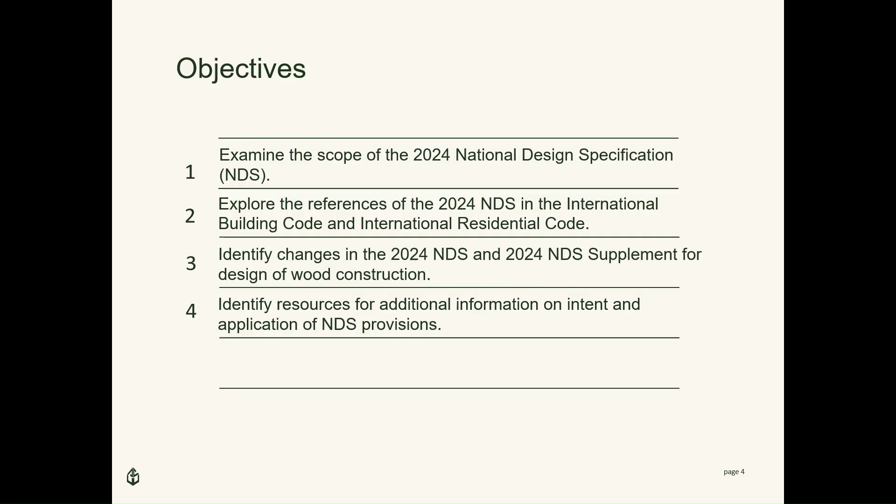Starting off with a little bit of history, the 2024 edition of the NDS is the 18th edition of the standard. The NDS was first issued in 1944 as the National Design Specification for Stress Grade Lumber and its Fastenings. In 1977, the title of the specification was changed to its present form.

This slide shows the scope of the 2024 NDS, which is the structural design of wood products and their connections. This basic scope has remained unchanged since the 1944 edition.

Beginning in 1944, the standard included visually graded lumber and glued laminated timber. In 1968, machine stress rated lumber was added - now it's grouped under mechanically graded lumber. In 1971, round timber piles was added. In 2001, round timber poles, prefabricated wood I-joist, structural composite lumber, and wood structural panel chapters were added. And in 2015, a chapter on cross-laminated timber was added.

Other milestone changes that occurred but are not picked up in this scope statement will follow. I thought I'd include these, knowing that many designers use the NDS for evaluation of existing structures, and knowing where some of these major changes occurred may help in the assessment of the building's vulnerabilities based on the design requirements at that time. So beginning with the 1968 through 1977 editions of the NDS, in particular 1968, 1971, and 1977, the standard saw reduced tension design values for either glued laminated timber or sawn lumber.

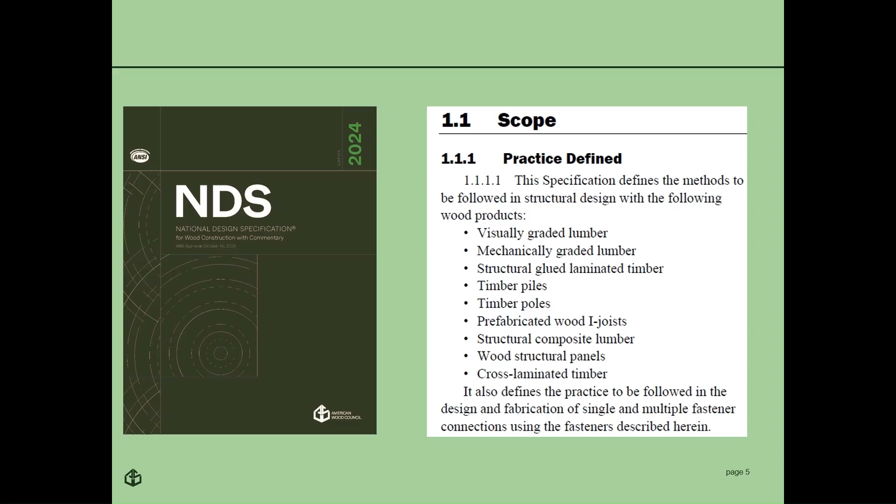The 2024 NDS is referenced in the 2024 International Building Code and the 2024 International Residential Code. In the 2024 IBC, primary references are in 2306.1 for allowable stress design of wood construction, 2307.1 for load and resistance factor design of wood construction, and 722.1 for calculated fire resistance of exposed wood members and decking. In the 2024 IRC, the primary reference is in R301.1.3 for engineered design of wood construction exceeding the limits of the IRC.

These code sections describe the general reference to the NDS, but more simply, for folks that aren't familiar with the NDS, it's used to size all structural wood elements, including wood rafters, floor joists, headers, beams, columns, and their connections in the IRC and the IBC.

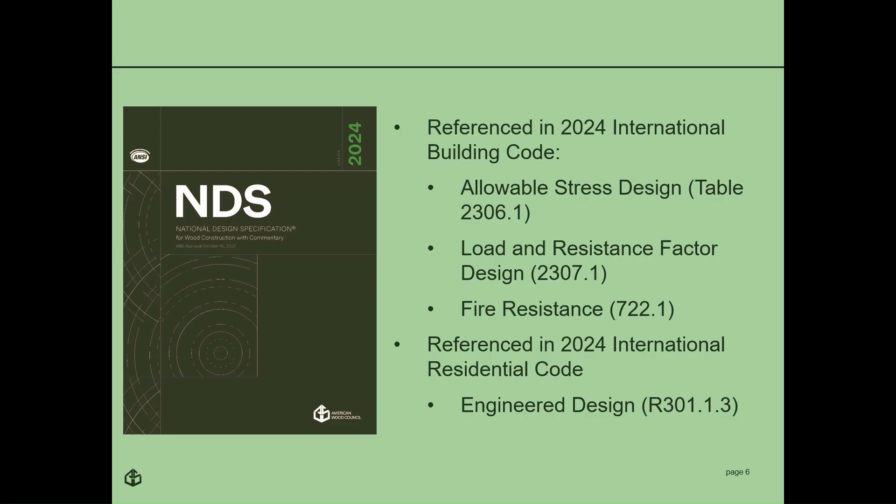This is the first of several slides taken from the redline version of the 24 NDS. The redline version is something the AWC Standards Committee uses when balloting the near final version of the NDS. New material is shown in red underline, and deletions from the 2018 NDS are shown in red strikeout. I'll be stepping through the redline version of the NDS. It has 16 chapters, 14 appendices, and a reference chapter section. By the end, my hope is that those of you using the 2018 NDS will have a very good feel for changes coming with the 24 NDS. And for those already using the 24 NDS, hopefully this will help you more quickly determine if there was a change from something you were doing previously.

So this is the one and only slide dealing with changes to Chapter 1. You'll see a change in 1.4.2.1. The term approved, meaning acceptable to the authority having jurisdiction, was added. It primarily comes into play when referencing manufacturer's approved instructions or manufacturer's approved evaluation reports. It also comes into play for use of approved alternate methods, alternate to those that are prescribed in the NDS.

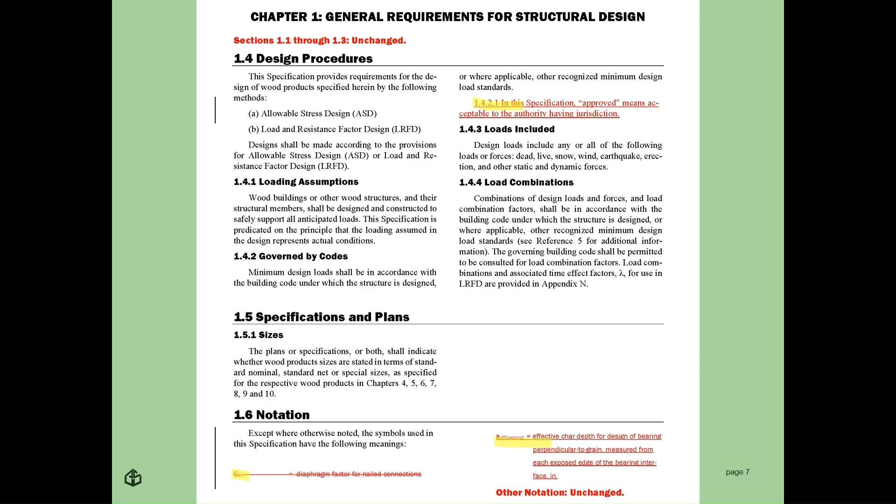Another change showing up in Chapter 1 is deletion of the diaphragm factor in notation. I'll cover that more in Chapter 12. Also, addition of the term A effective bearing, and that happens in Chapter 16, so I'll cover that when we get to Chapter 16.

For Chapter 2, Design Values for Structural Members, all the changes are shown on this slide. We can see in footnote 2 of Table 2.3.2, the words treated with are added, and this is done to clarify that load duration factors greater than 1.6 do not apply whether fire retardant chemicals are applied to wood through a pressure process or an alternative process that does not involve pressure. A similar clarification appears in section 234, except to achieve the same intent, the word pressure is deleted from pressure treated. One other change occurring in 234 is replacement of lumber and structural glue laminated timber with the broader term wood products, because a range of wood products can be treated with fire retardant chemicals, not just lumber and structural glue laminated timber.

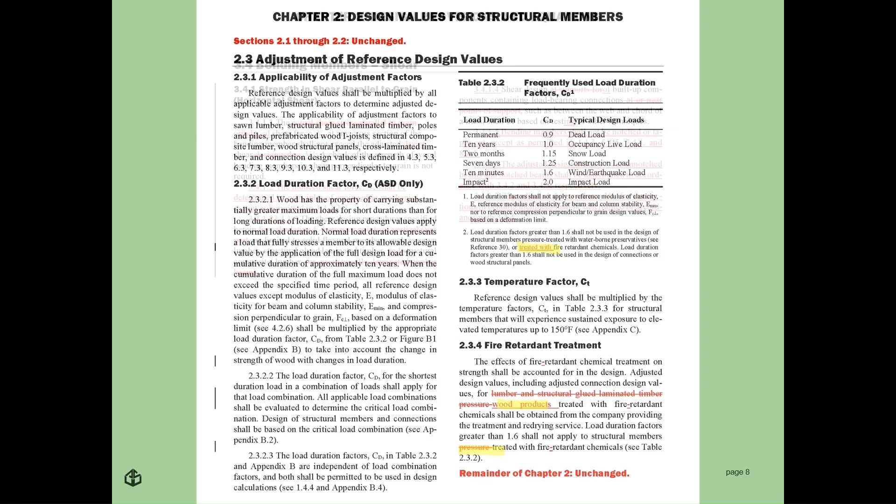Moving on to Chapter 3, this is the first of several slides dealing with design provisions and equations for design of wood members as beams, columns, tension members, and is not a product-specific chapter. As you'll see, most of the changes in Chapter 3 can be categorized as clarifications without leading to a change in member size.

Section 3.4.1.2 is a relocation of existing criteria to follow principles of engineering mechanics. Sections 3415, 3416, and 3417 are pointers to other sections of the standard to help users locate relevant requirements.

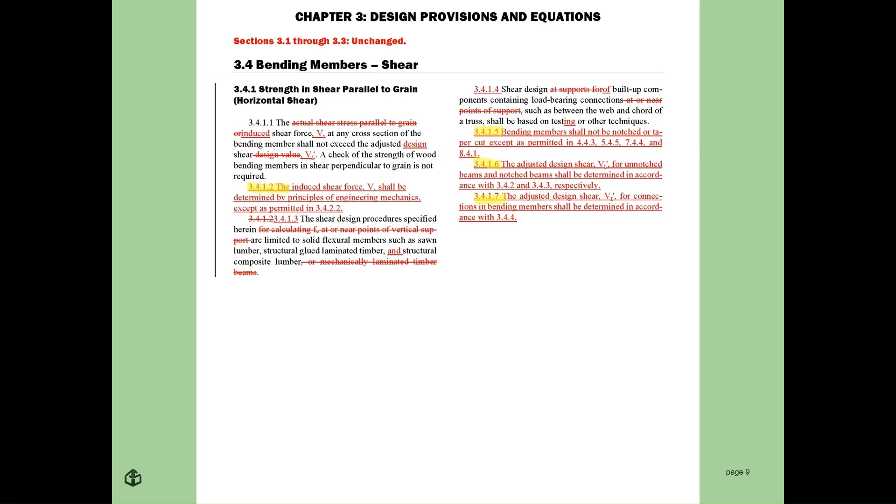In section 3.4.2, shear design equations for bending members without notches or taper cuts, we have a revised format of shear design equations that now solve for adjusted design shear, VR, instead of actual or induced shear stress, little FV. This can be seen in revised equations 341 and 342.

One of the reasons for the change to a capacity value formulation for unnotched members versus a stress value FV formulation was to line up with notch shear design equations also appearing in Chapter 3, and we'll see that on the next slide.

Equation 343 for adjusted design shear VR for a circular cross-section member, such as a pole or pile, is new in the body of the standard, but this equation showed up in the 2018 NDS commentary as well.

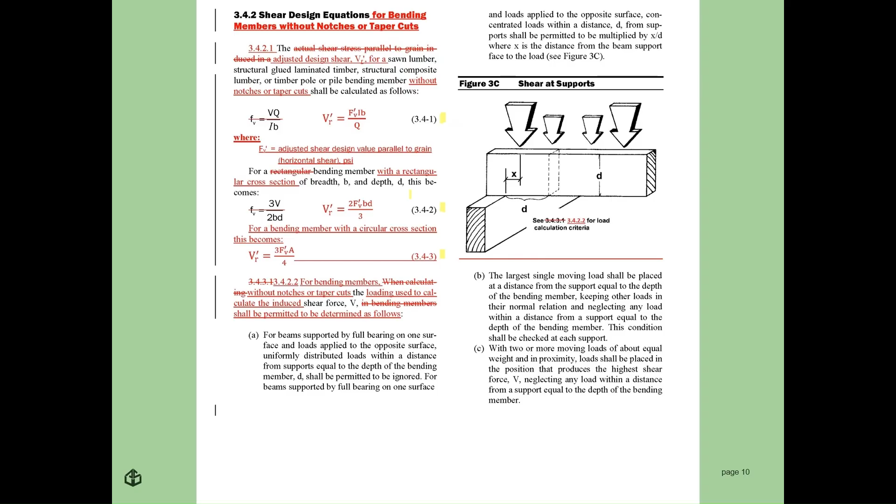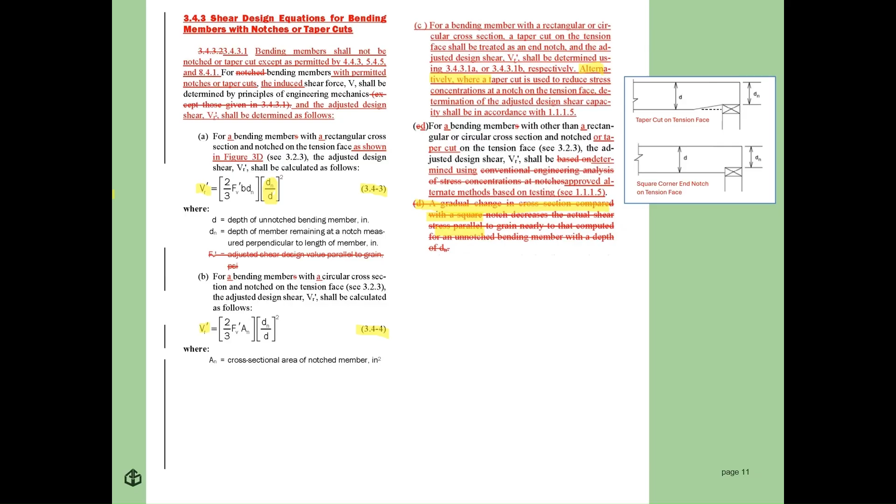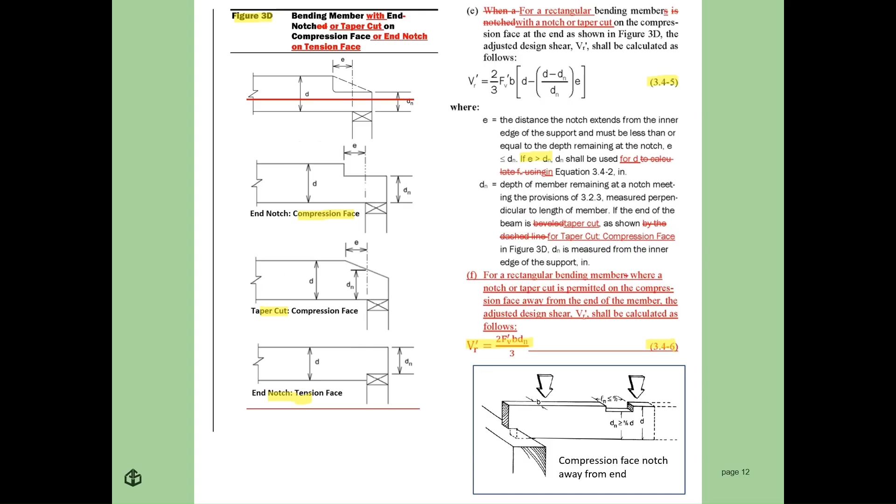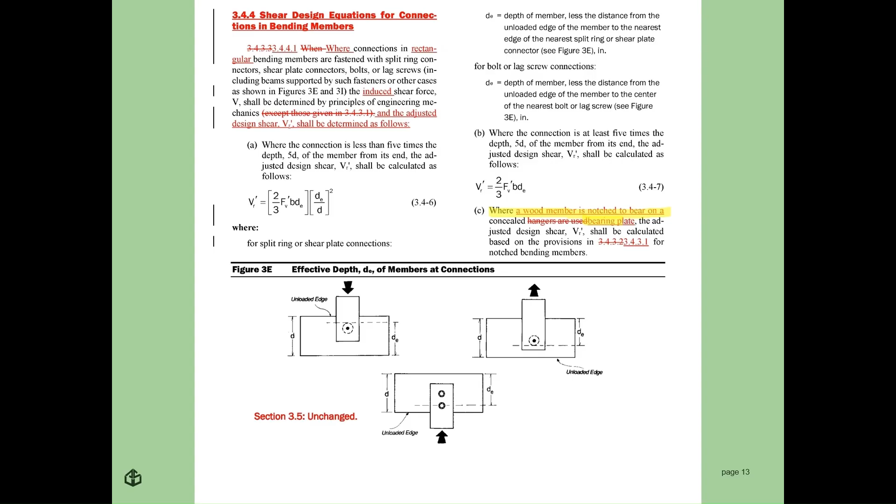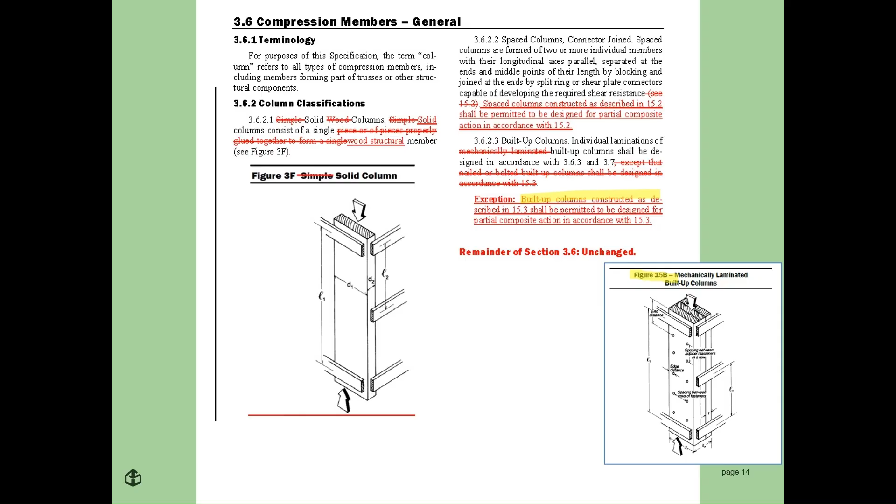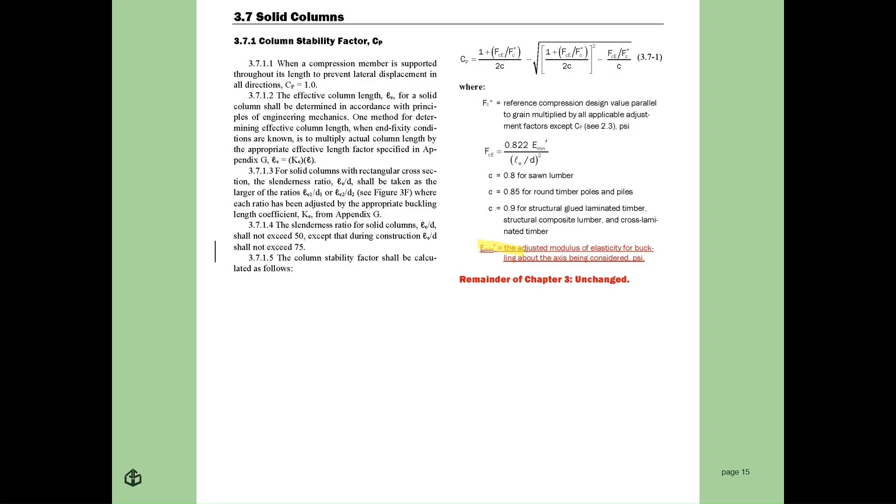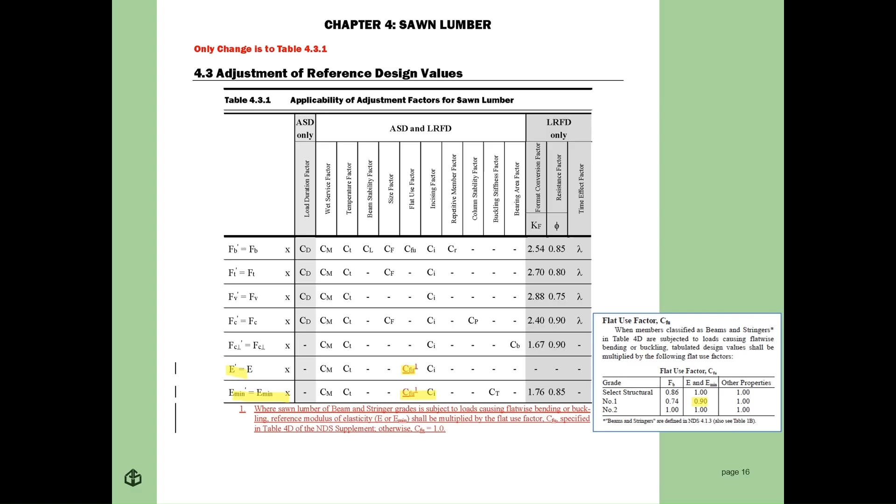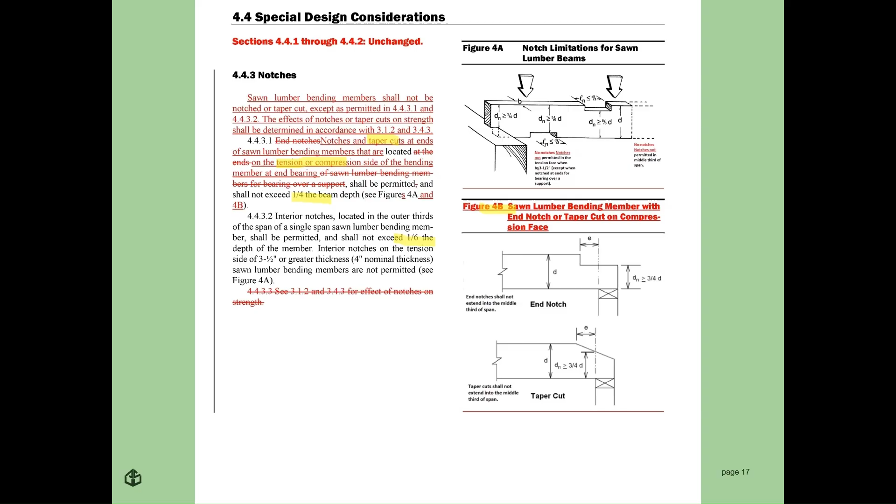Moving on to Chapter 5, Structural Glued Laminated Timber. Much like Chapter 3 and Chapter 4, the additions you see here are primarily to clarify existing requirements and provide pointers. Figure 5F is new. It depicts all of the former compression side notch and taper cut limits that were in the prior edition of the NDS, with one exception.

There is a new limit that was not in the NDS, and it is right here. This one is on the compression side, and notches shall not extend into the middle third of the span, nor more than 3dn. The 3dn limit is from AITC and APA literature on glue lam notching. The committee noticed that this limit was missing in the NDS upon balloting changes to this chapter.

Here is the lesser of 3dn or span over 3 limit in the figure. For users that were using APA, AITC guidance, and NDS altogether, this reflects no change. However, this is new in terms of NDS provisions.

Other things remained unchanged. On the tension side, the end notch is limited to 1/10 the depth of the member, or 3 inches. And then compression side end notches or taper cuts are limited to 2/5 the depth of the member. No change there.

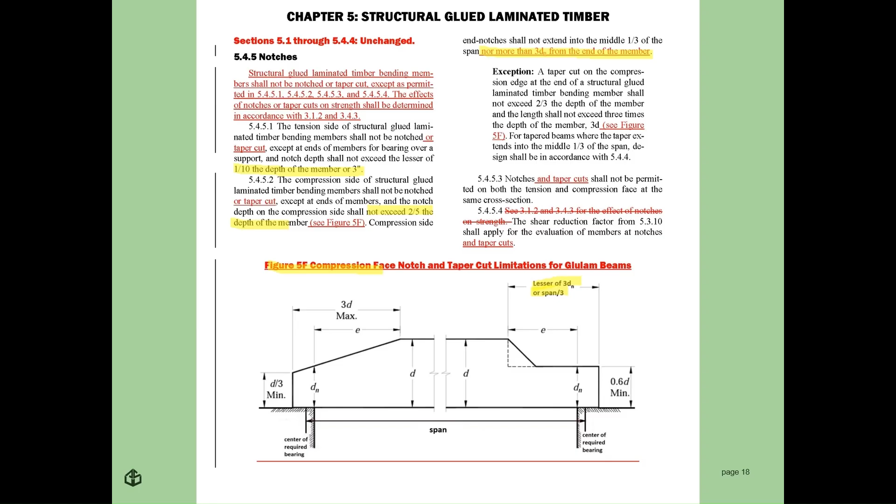Chapter 6, round timber poles and piles, no changes. Chapter 7, prefabricated wood I-joist. The major change being made here is the language manufacturer's approved recommendations throughout the section. So when you're seeking design values, that comes from approved recommendations or approved evaluation reports.

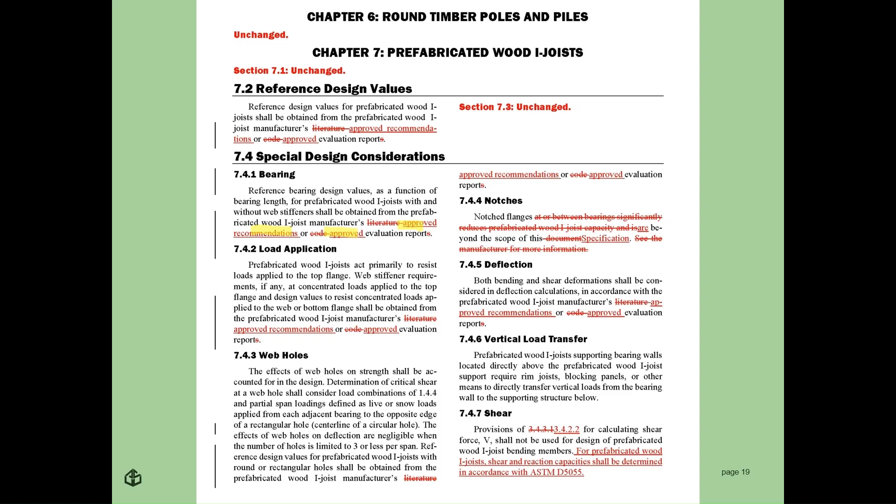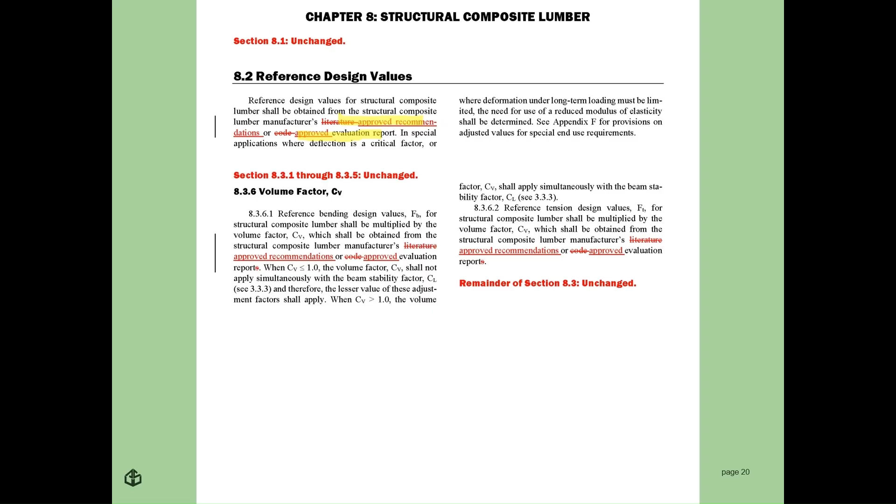In Chapter 8, dealing with structural composite lumber, again, we're picking up manufacturer's approved recommendations or approved evaluation report. And then for notching, like prior chapters, these changes are purely to be more clear on what the requirements are without technical change. The exception might be explicit clarification of how to deal with taper cuts, but I believe those judgments were commonly being made anyway.

Just taper cuts. Here's the 1/10 the depth limit that lines up with what's in place for glulam, and that's on the tension side. And then on the compression side, here's the 2/5 the depth of the member, which lines up with the 2/5 we saw for glulam.

We have new figures added, figure 8A, end notch on the tension face. Figure 8B is end notch compression face and taper cut.

One thing I want to circle back to, I didn't draw attention to this for sawn lumber or glulam, but in each of the product chapters, this is the SCL chapter, for notches, the language has this similar construction. Keep in mind this is specific to structural composite lumber, but similar language applies to sawn lumber and glulam. It says structural composite lumber bending members shall not be notched or taper cut except as permitted in 8411 and 8412.

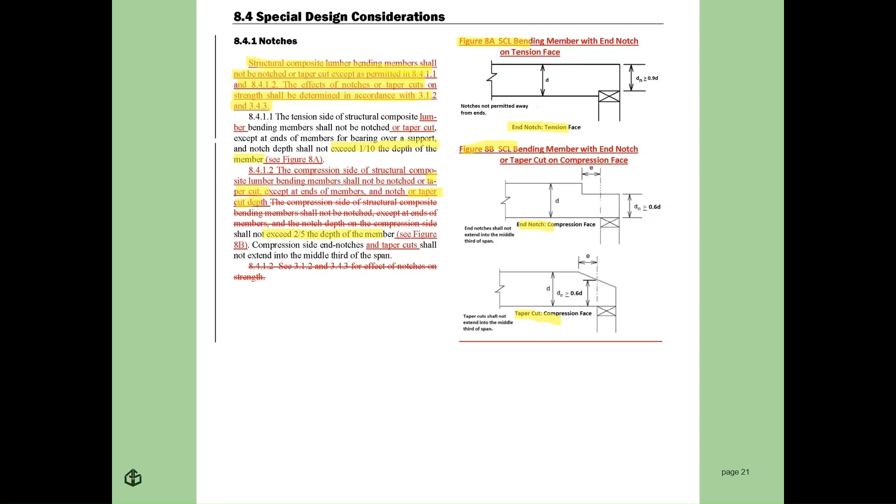Moving into Chapter 9, wood structural panels, no changes. For Chapter 10, cross-laminated timber, we see this language: manufacturer's approved recommendations or approved evaluation report.

No other changes. In Chapter 11, 11.3.2, there are a lot of edits, but it leads us to the same technical endpoint: load duration factors do not apply when metal parts or concrete or masonry parts control the design. That's the same intended outcome of former NDS language, but stated more clearly.

And then in 11.3.5, fire retardant treatment, we see the same revisions that were implemented in Chapter 2. So no technical change here.

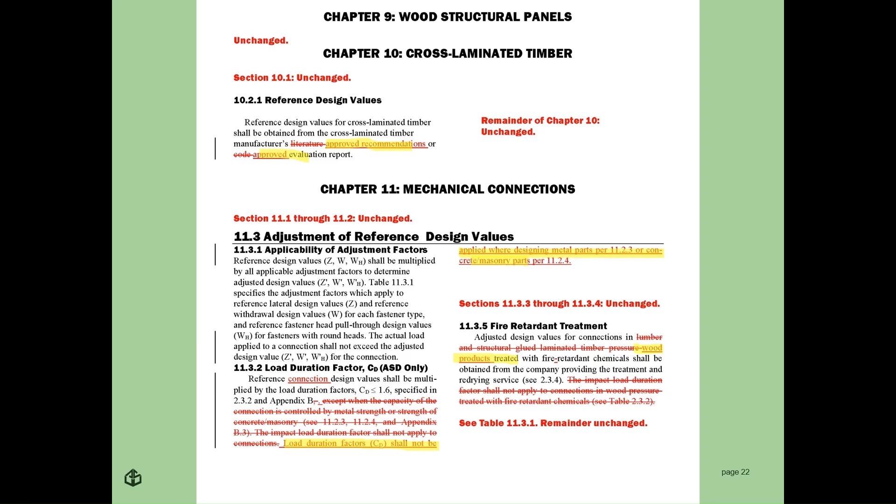In table 11.3.1, the diaphragm factor is being deleted, and I'll be covering this a little bit more in Chapter 12.

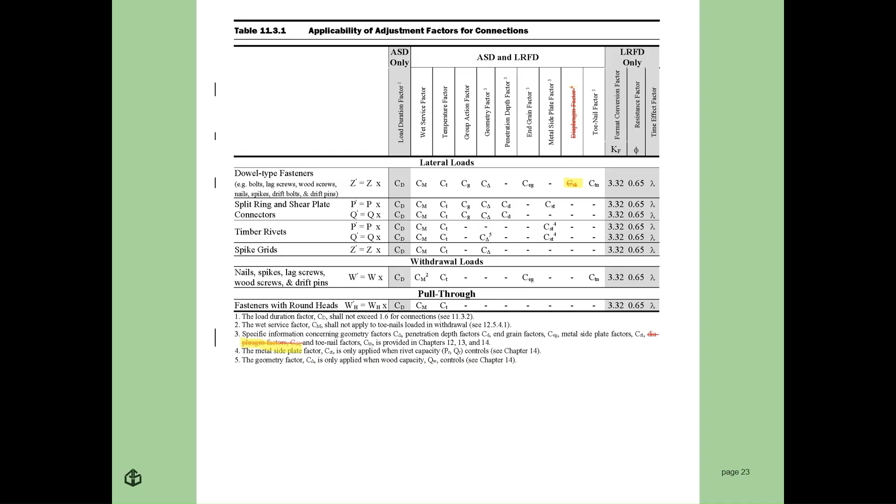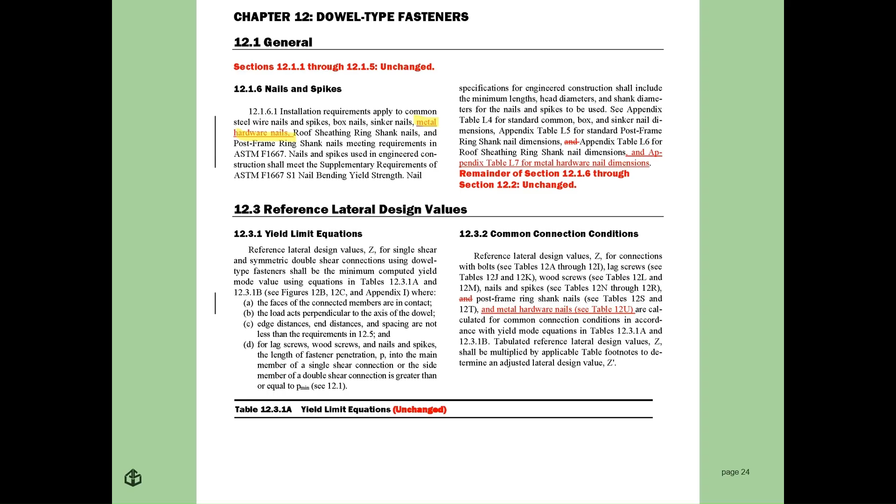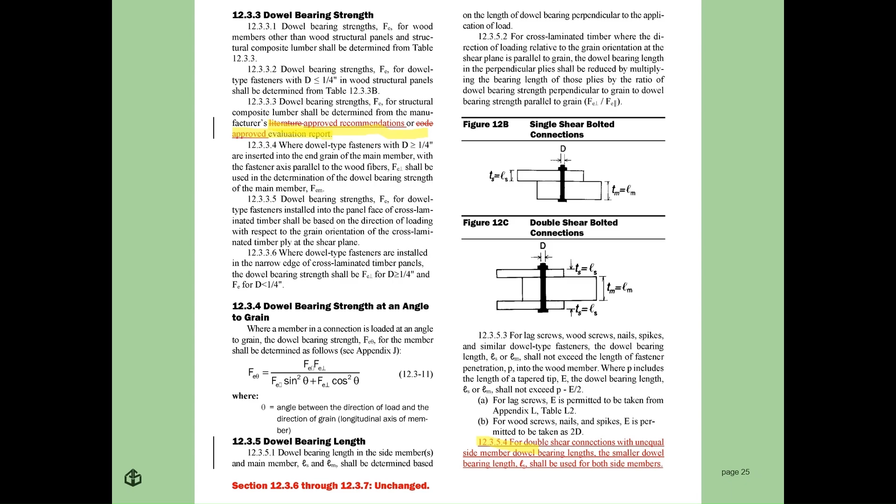As large wood member connections with knife plates have become more prevalent with heavy timber and the increased use of heavy timber, we had reason to revisit these provisions, and we did identify cases where this existing criteria might give values that were unconservative compared to a more detailed analysis. So what we did is we came up with a design approach still based on applying the yield equations to capture a proper Z value when there's multiple shear planes.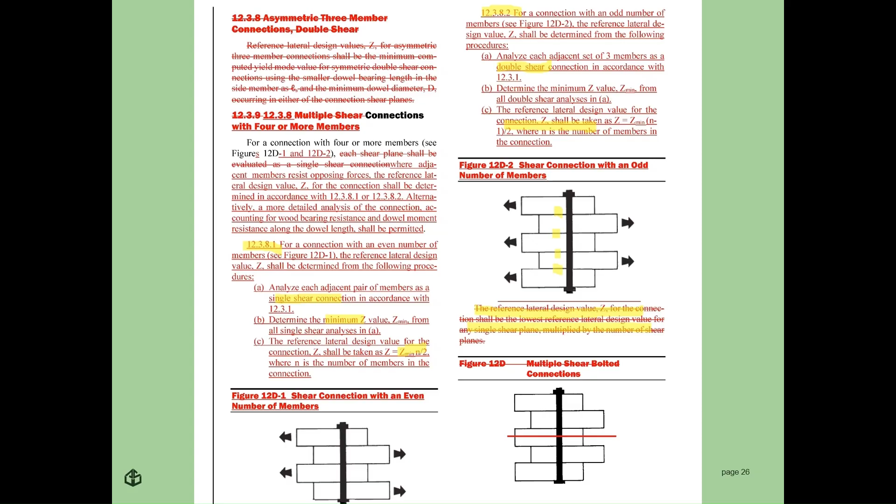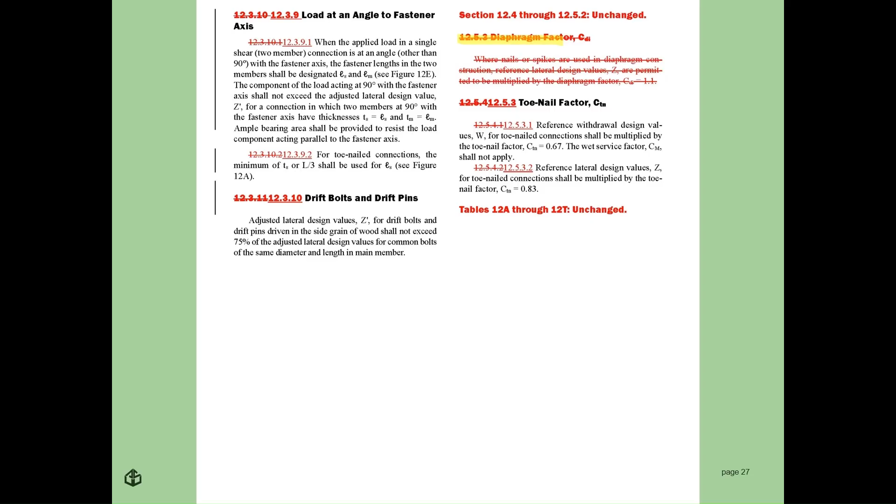Moving on to the diaphragm factor, here we see it's being deleted. The reason is the factor is no longer considered necessary, as it has been included in design values in the special design provisions for wind and seismic. Because the factor itself was based on tests of nailed structural panel diaphragms, the potential to apply this to other diaphragm types was viewed as limited, so it didn't seem warranted to continue with the factor. It has been deleted.

Here's a table adding the metal hardware nails, again following the same principles used for other nail design value tables. Something unique here is that the metal hardware nail tables incorporate values for low to medium carbon steel and medium carbon steel.

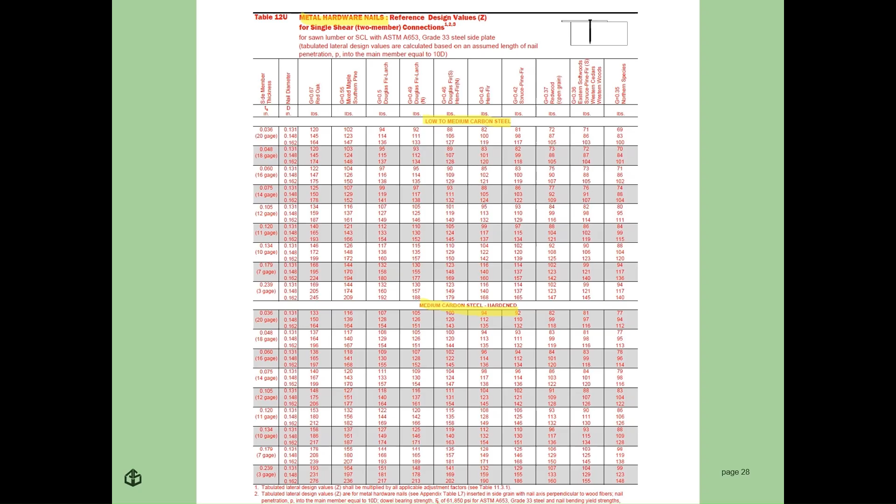And the footnotes are here, I know it's hard to read. These footnotes reflect different bending yield strength assumptions for the nails, depending on whether it's low to medium carbon steel or medium carbon steel hardened.

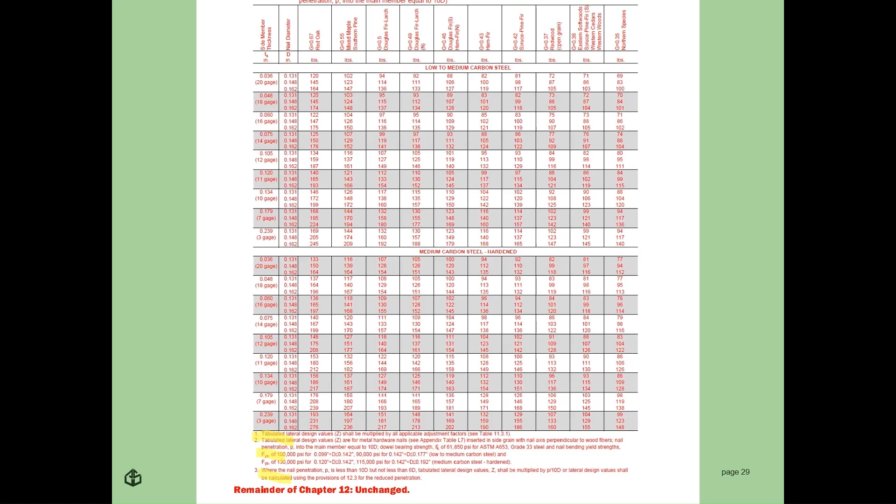Moving on to Chapter 13, split ring and shear plate connectors, no changes. Chapter 14, timber rivets, no changes. Chapter 15, special loading conditions, only an editorial clarification for resisting buckling added to the space column provisions, right here.

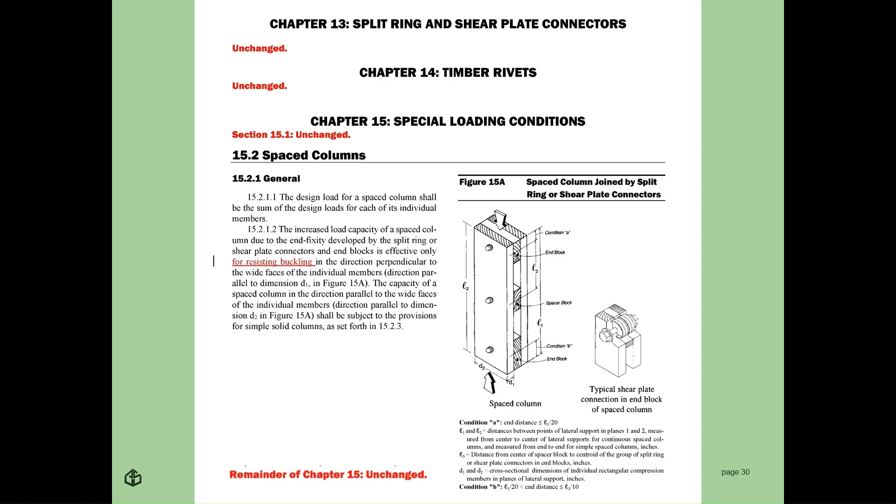Okay, in Chapter 16, we have significant changes. Overall, Chapter 16 has changes that fall under reorganization, but most are to align with the requirements in the 2024 Fire Design Specification for wood construction.

Before I get into some of those, I wanted to describe our committee concerns as we were expanding Chapter 16 of the NDS. The basic concern was we are expanding the kind of calculations that were needed, conditions that needed to be considered, etc. There was concern that these calculations would always be required because they exist in the NDS, and that the designer would be responsible for providing such calculations in all cases. What we worked out is that Chapter 16 is viewed as a standard tool to help demonstrate compliance of wood to meet code requirements for fire resistance, calculated fire resistance to be more specific.

So if there's a requirement for a calculated fire resistance, or if there's a pathway where calculated fire resistance can be used to demonstrate what is acceptable, then Chapter 16 can be used and viewed as a tool. It's not the other way around. The existence of the approach doesn't require it to be used in all cases. That became clear in our discussions, and it's also reflected in the updated commentary to the NDS.

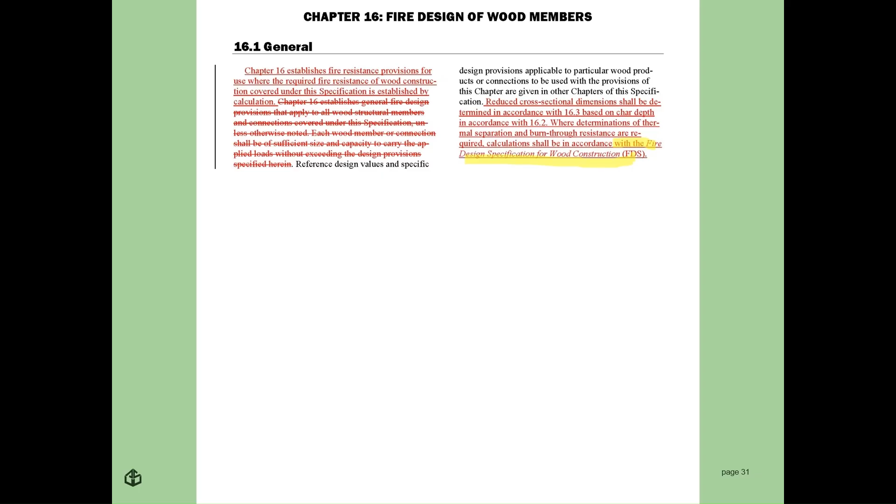As part of the Chapter 16 reorganization, 16.2 is revised to address charring of wood, and 16.3 is revised to address fire resistance. 16.2.2.3 and 16.2.2.4 point to the FDS for less common configurations and analysis of char in CLT. Pointers were considered preferable for the NDS over duplication of FDS requirements in the NDS. You can see that 16.2.2.3 addresses CLT with laminations of unequal thickness.

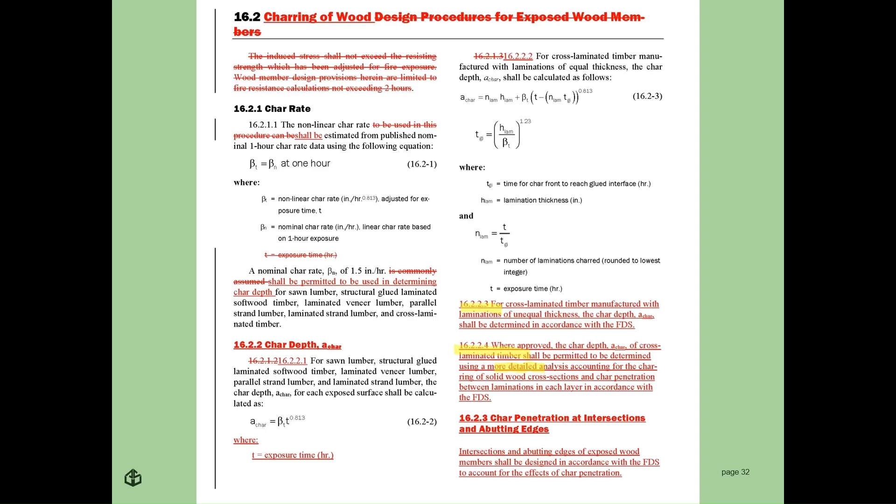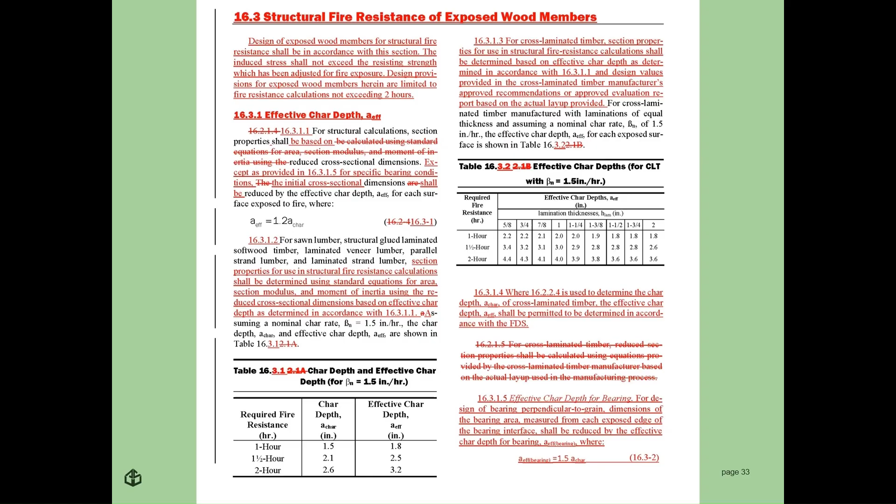16.2.2.4 addresses detailed analysis of CLT char penetration between laminations. Here, existing information in Chapter 16 of the 2018 NDS is largely regrouped under 16.3, structural fire resistance of exposed wood members.

Most of the new information is brought forward from the 2024 FDS to bring consistency with requirements of the FDS. One new item is here in 16.3.1.5, and it's something we first saw in this program in section 1.6 notation: the addition of effective bearing. It's a new term, and what it's doing is recognizing that the char depth for bearing is 1.5 a char. This accounts for the increased loss of strength and stiffness in bearing perpendicular to grain applications. The NDS has good commentary on this as well as the FDS.

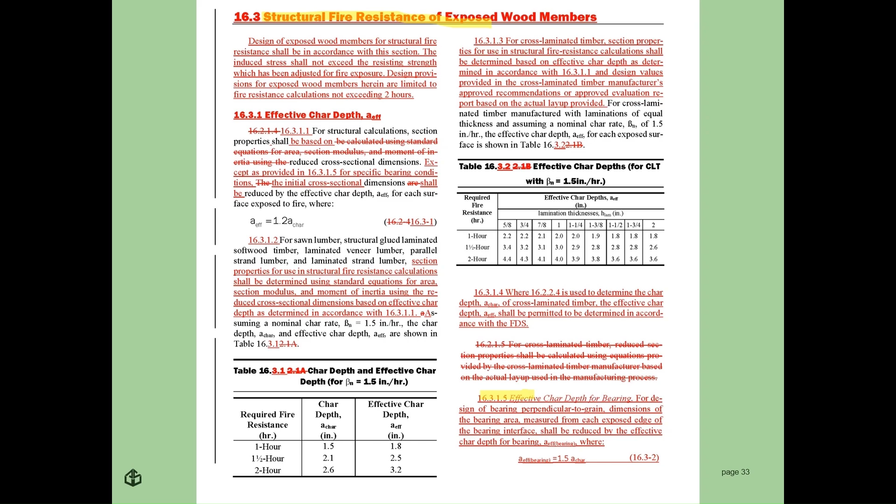In these sections, changes are mostly improved language, and for lumber decking, revisions bring alignment with more detailed language of the 2024 FDS.

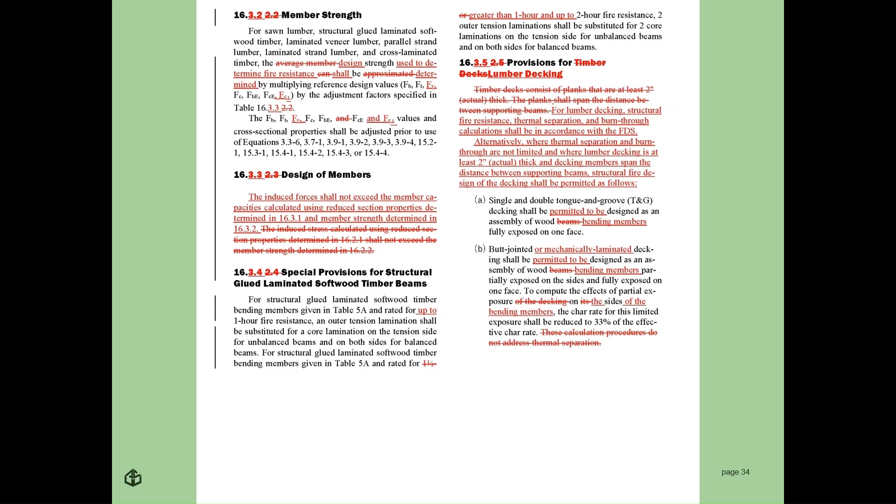Again in Chapter 16, this is the final slide. We have new adjustment factors for shear strength and bearing strength, and a footnote cautioning against further application by load duration, temperature, and moisture factors. These line up with the fire design specification.

16.4 on structural fire resistance, protected wood members, lines up with requirements of the fire design specification. In fact, there's a pointer there to the FDS. And then in section 16.5, wood connections, it incorporates a pointer to the FDS and cleans up language.

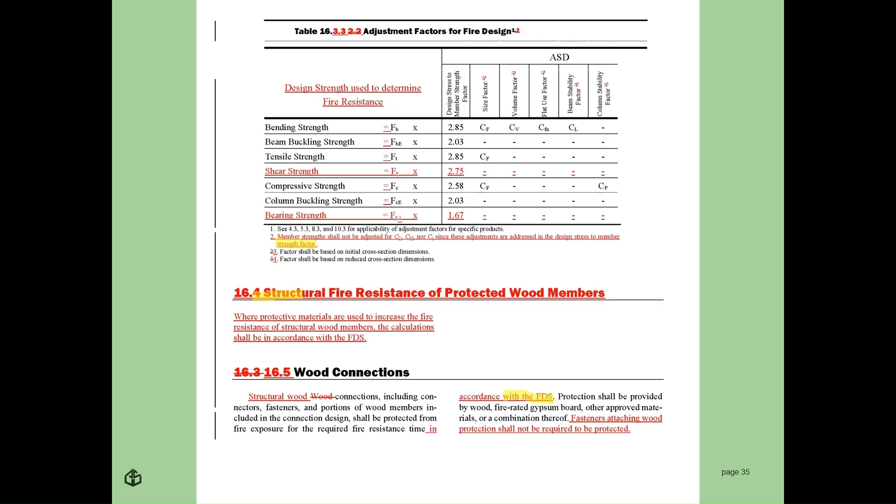Moving on to appendices. Appendix A, construction and design practices, no change. Appendix B, load duration, no change. Appendix C, temperature effects, no change. Appendix D, lateral stability of beams, only editorial change with E-min notation added.

Appendix E did receive changes, and they are going to appear extensive, but they are primarily for two reasons. One is expanding Appendix E to address single fastener wood strength limit states. The second is a basic cleanup of the examples to make them easier to follow. Here's the single fastener inclusion in Appendix E.

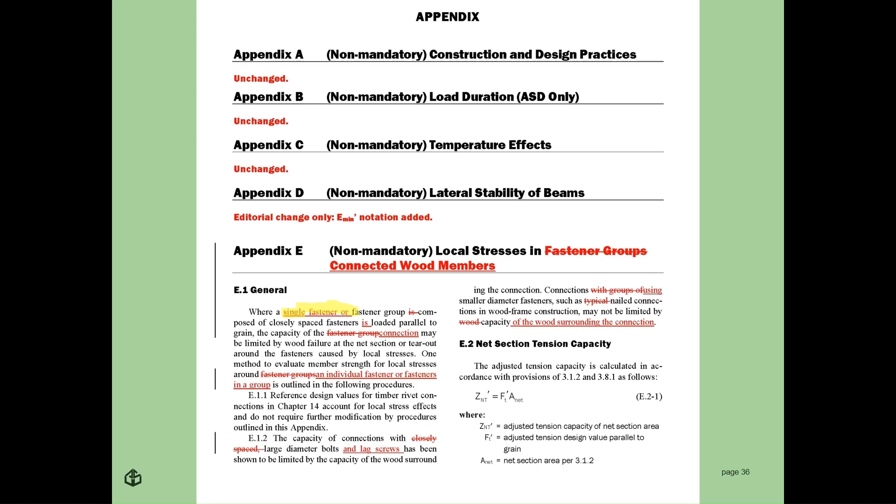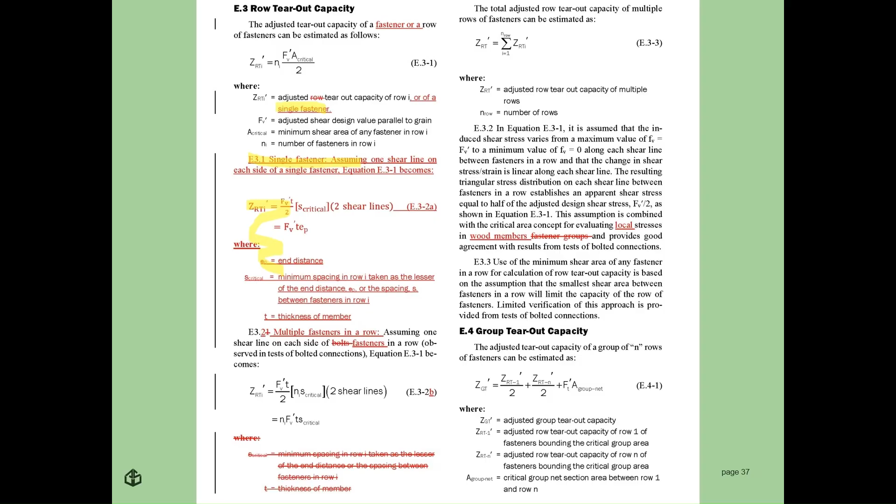So here are some changes in Appendix E addressing addition of single fasteners. Note here, and then a full example for single fastener is all in here. Here is a new example addressing a single bolt connection.

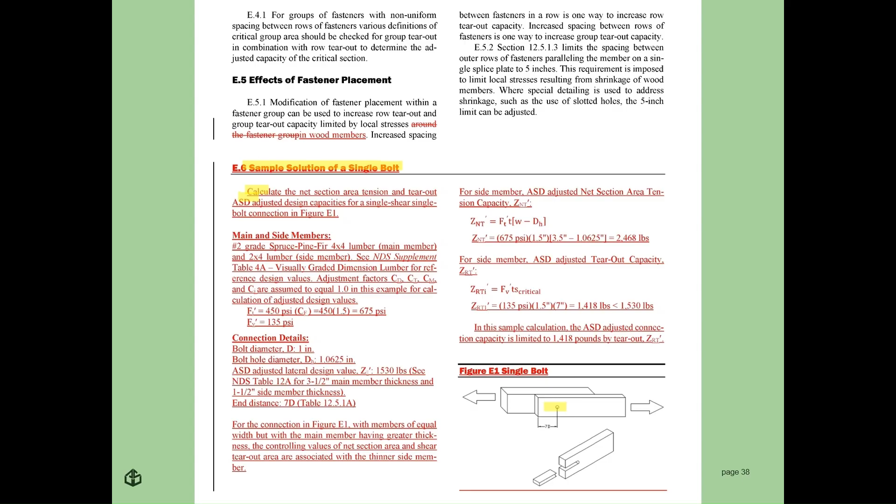Here's a clarification for multiple bolt connection with a staggered row of bolts. Language is updated, but there's no change in the final answer.

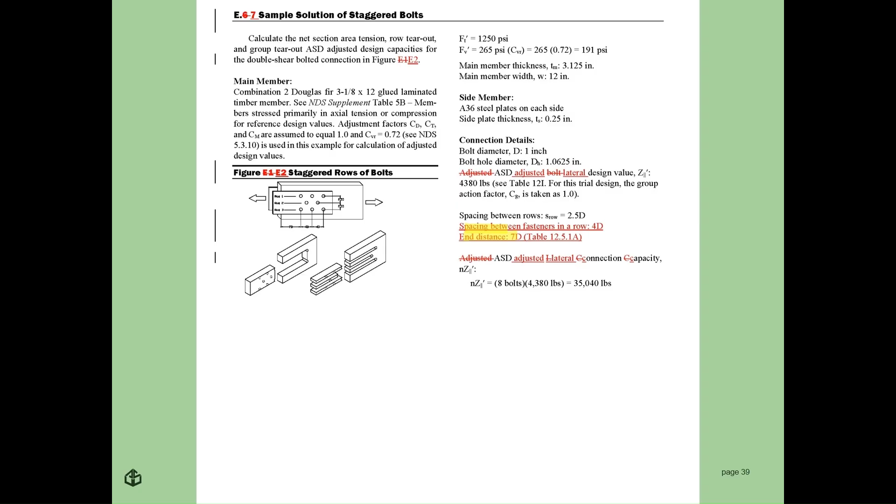Here, the single row bolt example is updated. No change in final answer.

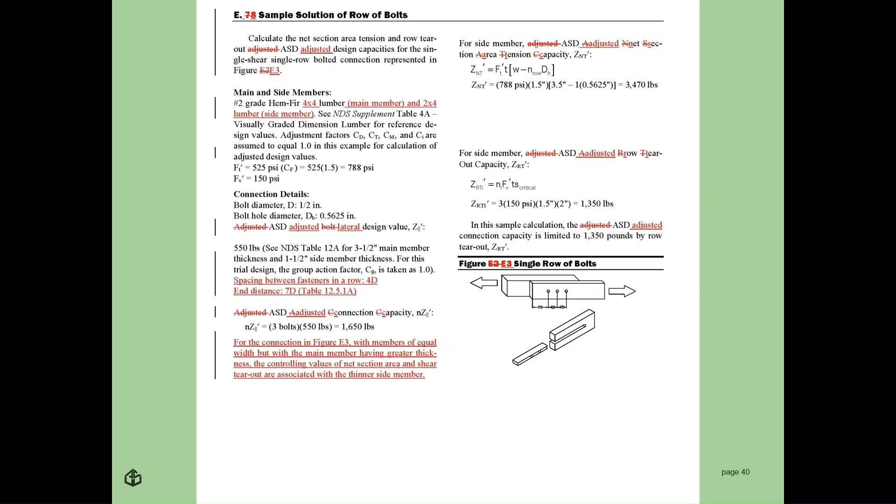Single row of split rings is updated. No change in final answer.

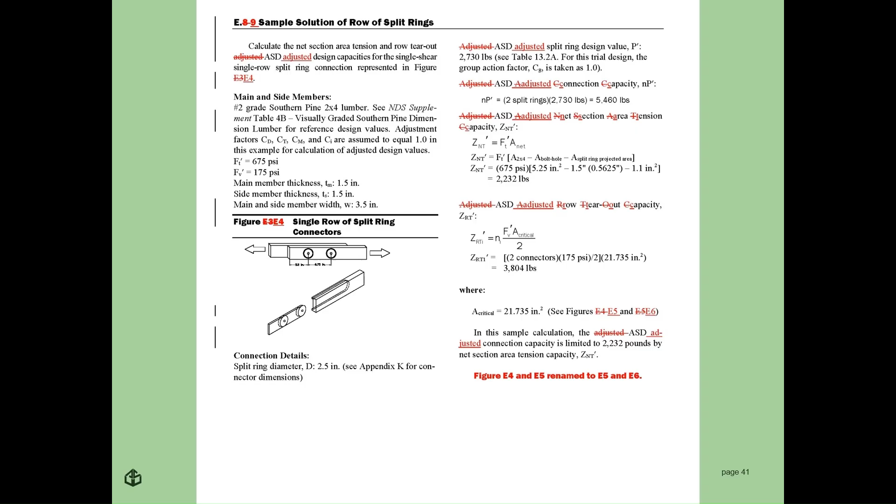Appendix F, design for creep and critical deflection, no change. Appendix G, effective column length, no change. Appendix H, lateral stability of columns, editorial change only with E-min notation added.

And then Appendix I, metal hardware nails added in the appropriate sections for fastener bending yield strength.

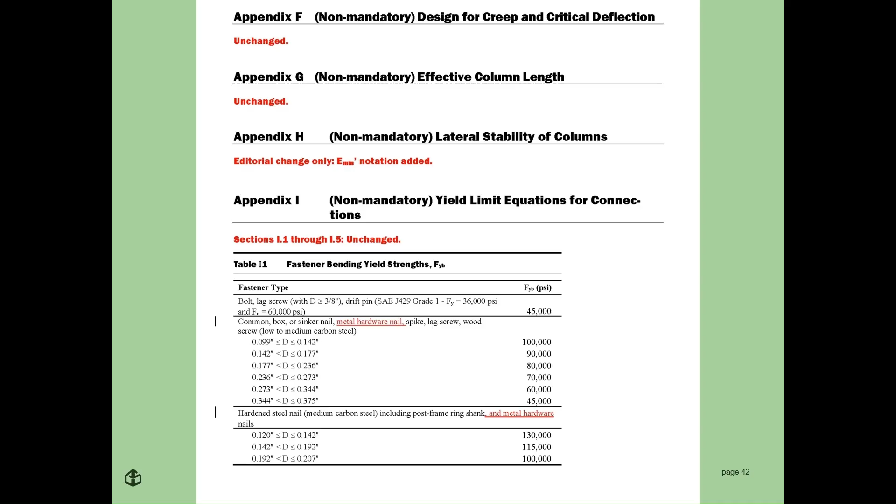Appendix J, solution of Hankinson formula, no change. Appendix K, typical dimensions for split ring and shear plate connectors, no change.

Appendix L, typical dimensions for dowel type fasteners and washers. Metal hardware nails are added.

If you scrutinize the table down here, you'll see the diameters and lengths, generally shorter lengths to account for the thinner side member of metal hardware.

The nail is available in both smooth and ring shank, and the head diameter in all cases is 0.281 inches. And that happens to be a common size for power tool nails.

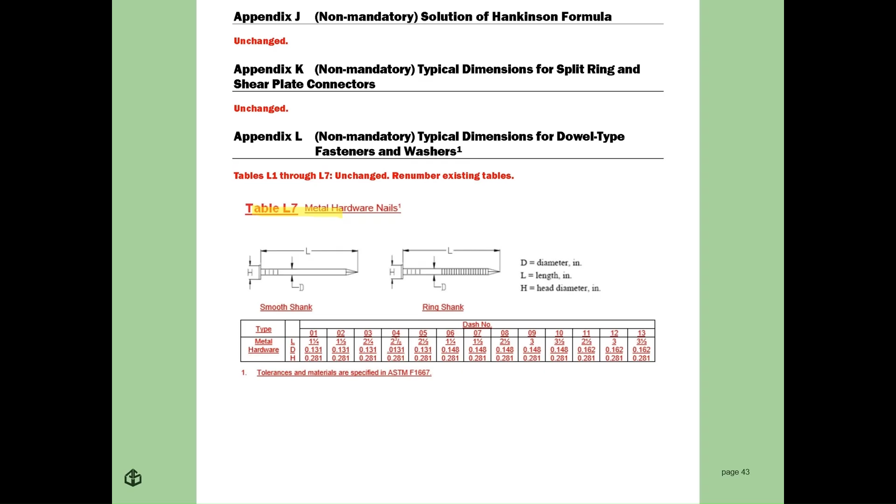Appendix M, manufacturing tolerances for rivets and steel side plates for timber rivet connections, no changes. Appendix N, load and resistance factor design, no changes.

And then for references, reference to the Fire Design Specification 2024 edition is added.

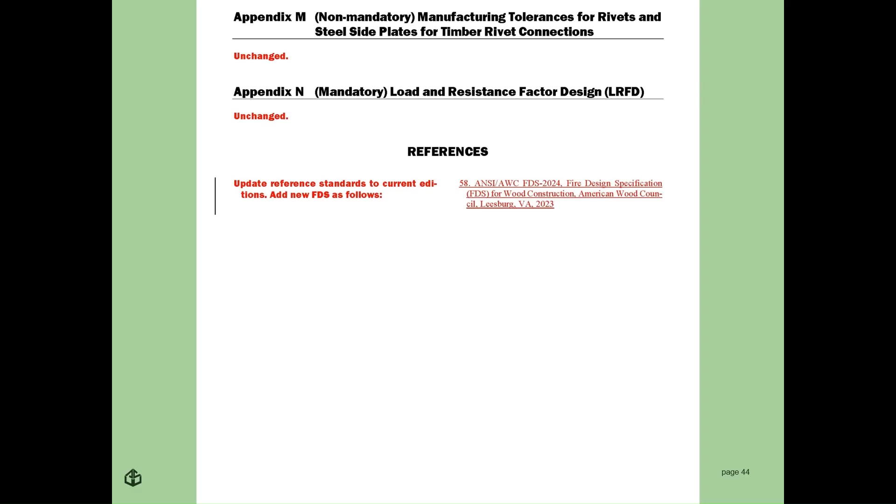So the NDS supplement includes a few changes this cycle. This slide is just to show the extent of design value tables in the 2024 NDS supplement. Only a few have changed, and I'll highlight those.

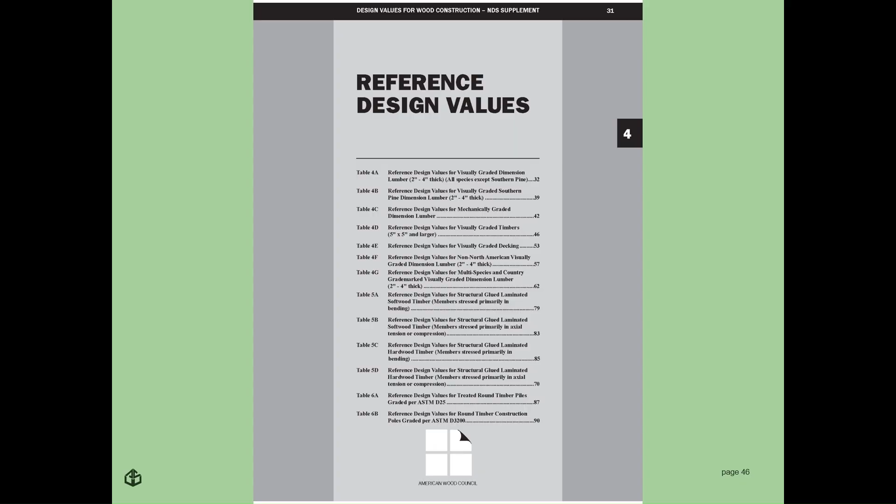One of the design value tables changing is for glulam. The primary change is the replacement of EX apparent and EY apparent in the glulam tables with EX and EY. I know this is hard to read, I apologize for that.

So now the tables have three sets of E values. EX true, which is a shear-free E. EX, which is an apparent E, includes the effects of shear deformation. And then EX min. There's similar notation for EY: EY true, EY, and EY min.

And then those values are described in greater detail and expanded footnotes. Importantly, I think this will be helpful to users: EX min and EY min are stated to be used in beam stability and column stability calculations. These similar types of changes for E are in glulam tables, primarily stressed in tension as well.

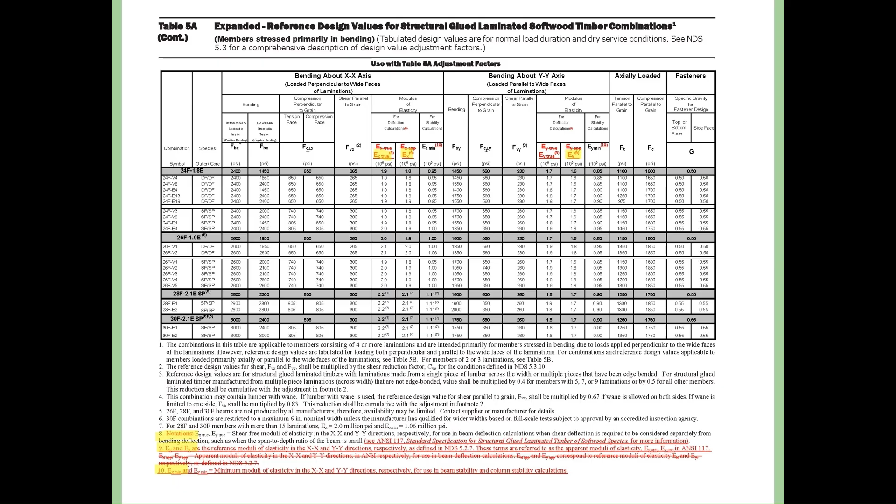And here's table 5B for glulam. This table is geared towards applications where the member is stressed primarily in axial tension or compression. And we'll see similar changes going on with E here, as well as clarification in the footnotes.

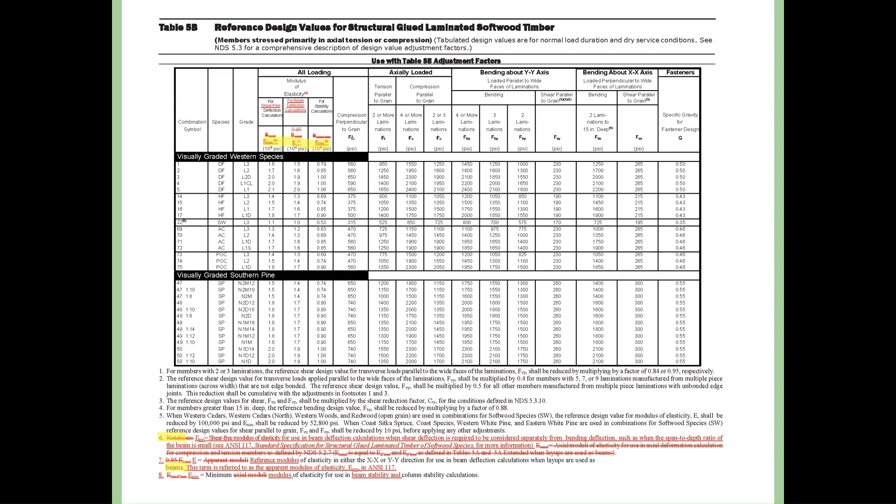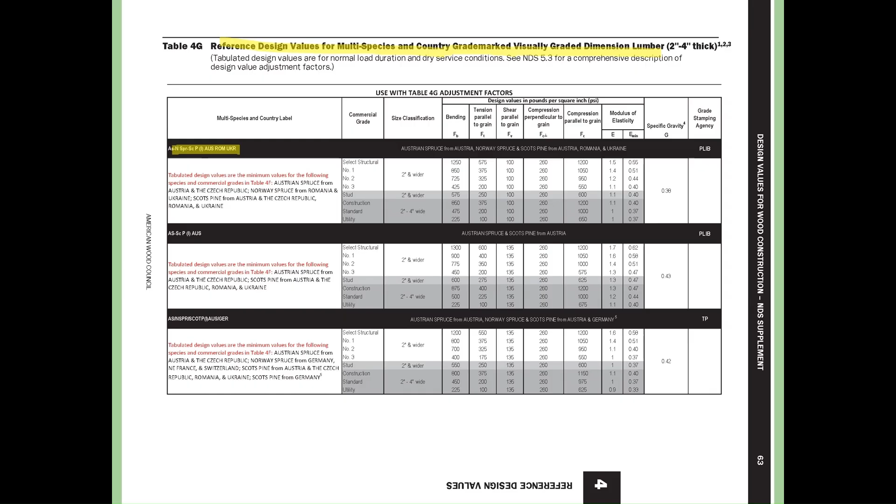Another change is addition of table 4G, reference design values for multi-species and country grade marked visually graded dimension lumber. The label is fairly complex because many species are usually involved in each of the groupings. I'm showing one page of this table, but this table spans multiple pages in the NDS supplement.

And there was an addendum to the 2018 NDS supplement that had the same type of information, but this is the first time this table has formally appeared in the NDS supplement.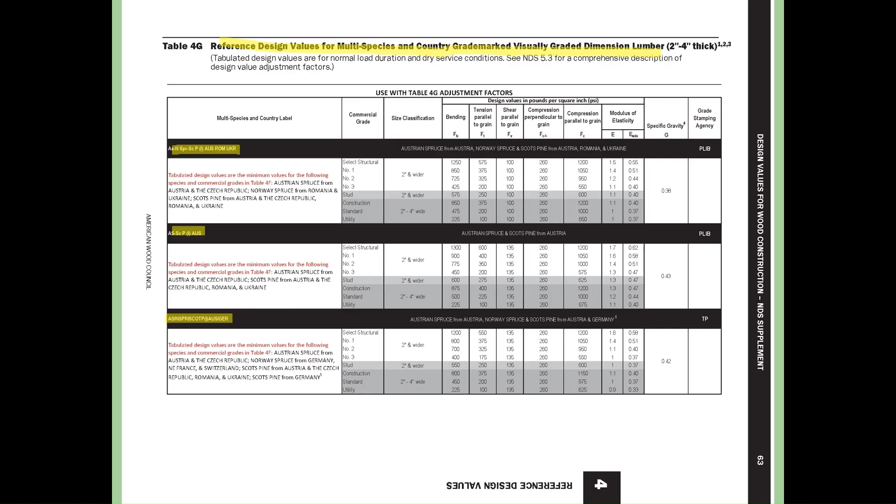So moving on to NDS commentary, it's a great resource for additional information, and I'm going to show some examples here now.

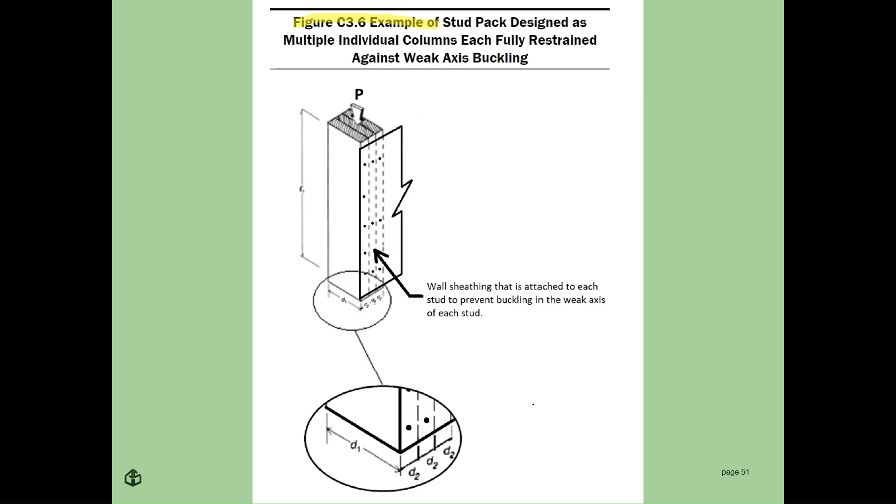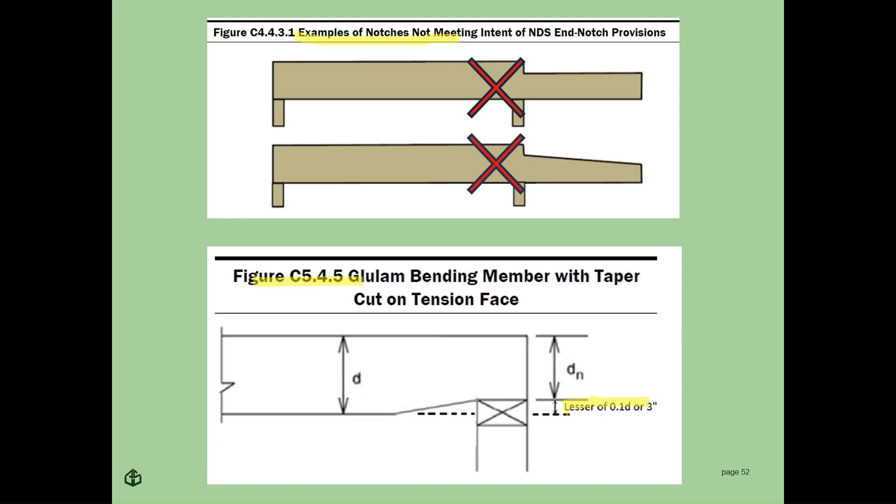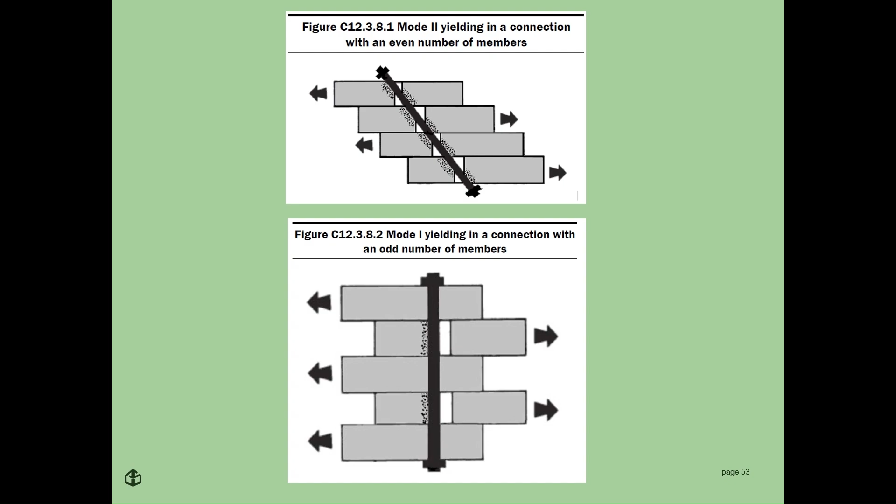And with that, we've reached the conclusion of this program, and I wanted to thank you for your interest.